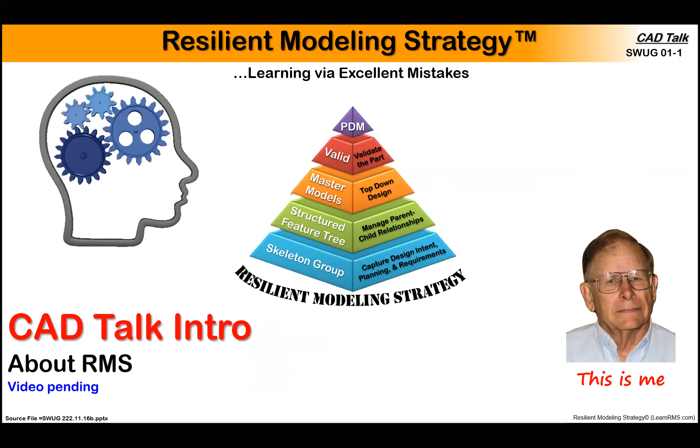Pushing the wrong button. Story of my life.

Okay, that's me. I was 54 years old in 1992, and I became a PTC value-added reseller in Arizona. Previously, 35 years, yes, I'm an electrical engineer dealing in mechanical shit. Radio communications, core memory systems, how about that for dating you? And semiconductor manufacture, memory design and manufacture.

So 1992, I fought in the CAD wars of the 1990s, became a Solid Edge VAR in 1998, and joined the solids modeling revolution of the 2000s. Yes, I'm older than dirt, 84 years old. In 2012, there were 4 issues that really bothered me. And I'll go through them.

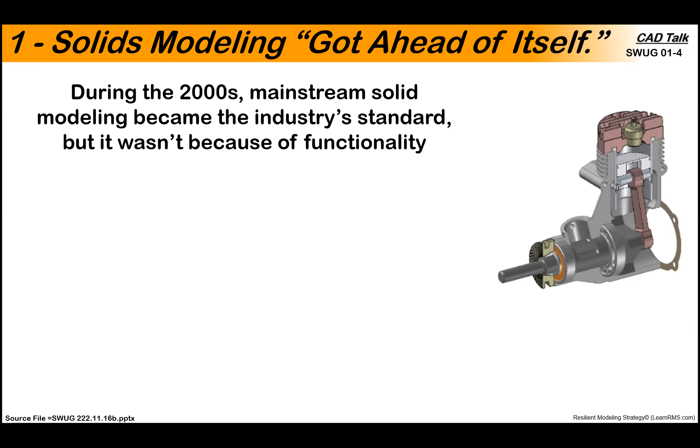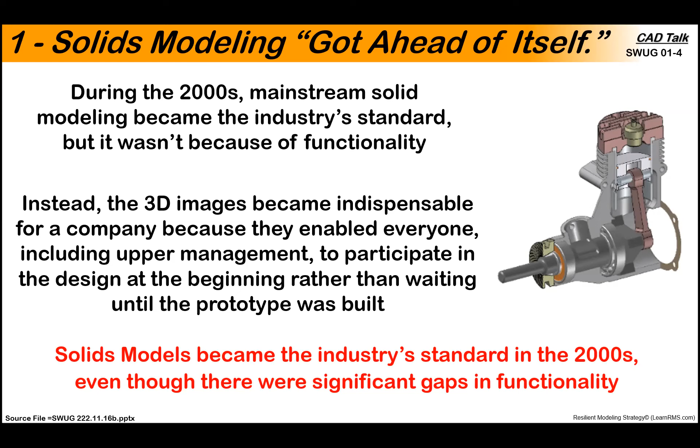The first issue was during the 2000s, mainstream solid modeling became the industry standard, but it wasn't because of its functionality. It was because these 3D images became indispensable for a company. They enabled everyone in the company to see what was going on. In the old days, we used to build a prototype, and that's when manufacturing could tell. So everyone got involved at the beginning. So 3D images were the thing. But solids modeling became the industry standard, but there were significant gaps and problems with its functionality.

And another thing, for every new software version, monetizable enhancements have priority. That's a given. And then users, but they're mostly prismatic modelers, vote on the remaining enhancements. Here's the problem. Advanced functionality isn't easy to monetize. So that didn't happen too easy. And prismatic modelers, they're up to their neck in problems, and they usually vote for Band-Aids, okay?

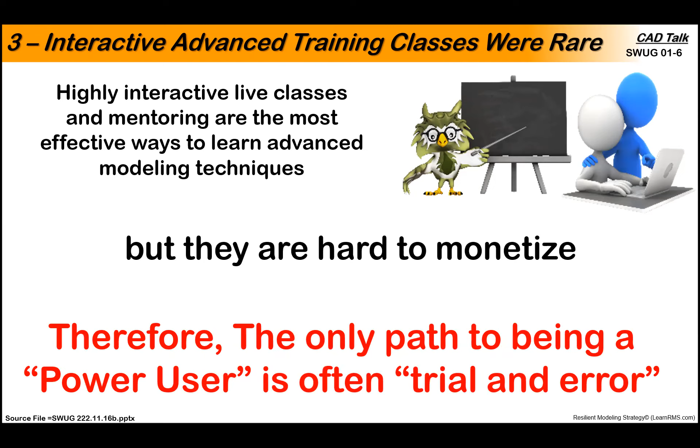Now, interactive advanced training classes were rare. And realistically, that's the only way to learn advanced modeling. It's the only way. But they're hard to monetize. So you don't see a lot of them out there. And therefore, the only path to becoming a power user is often just trial and error. And most of the power users that you see nowadays, they learned it on their own.

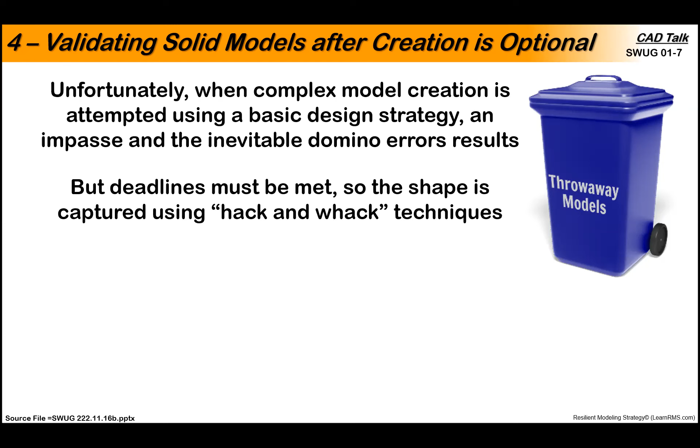And here's another problem that's plaguing us. Unfortunately, when a prismatic modeler, that's someone that's learned how to make models with the 3 default datum planes, attempts a complex model, he uses the same strategy. And it's not long before he comes to an impasse, he has domino errors and stuff like that. But deadlines must be met. So the shape is captured using hack and whack techniques. I think everyone here knows what that is.

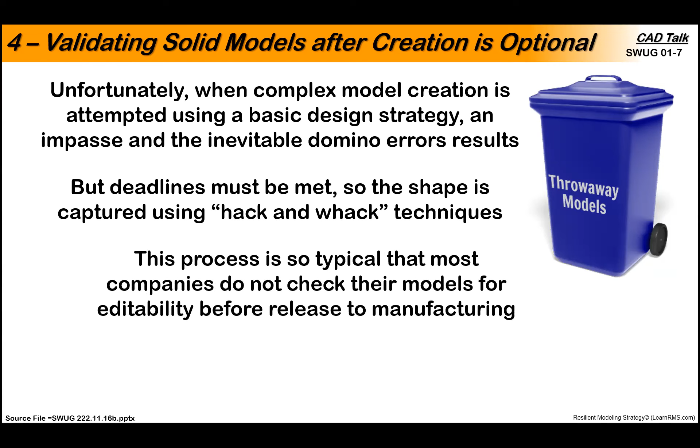And this process is so typical that most companies don't check their models for release to manufacturing. So there's an epidemic of throwaway models in the worldwide inventory. So in 2012, I decided to rain on the solid modeling parade. I had 20 years of interacting with power users, mentoring, and the 4 issues were a recurring theme. So I created a presentation called Resilient Modeling Strategy to highlight these issues, but more importantly, to offer solutions. And I selected Solid Edge University as my soapbox and proceeded to organize my thoughts.

That all came from the about section on my website. Just a minute. And there's 2 more pages to it. The second page tells how I failed miserably at communicating. And then the third is that during COVID, I worked on this. In 2019, I had pretty well given up, that no one cared about resilient modeling. I went on and worked on it because I didn't have anything else to do. All of a sudden, this thing kind of morphed into something that I hadn't planned in the beginning.

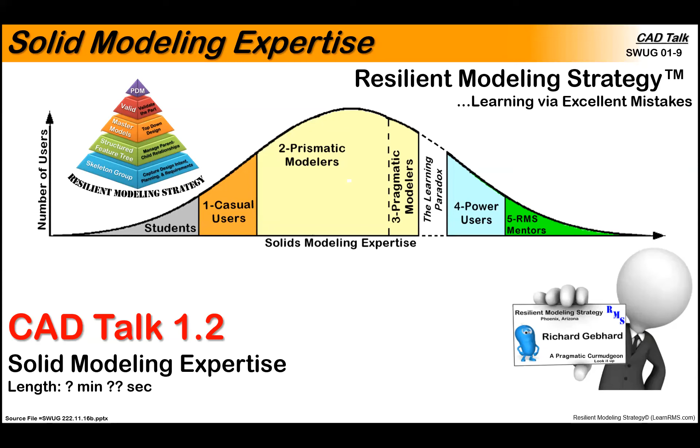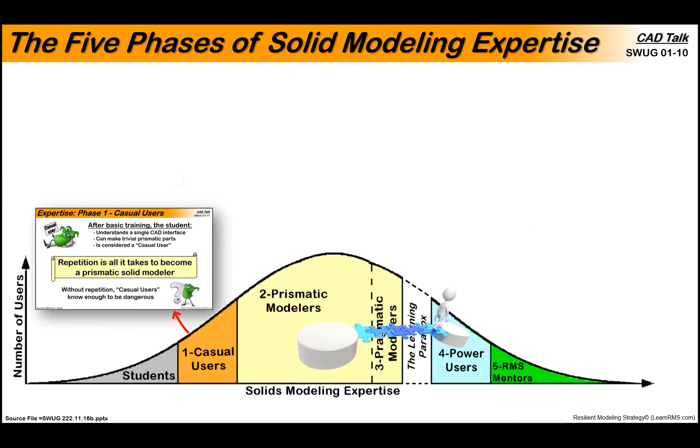What I'm sharing with you today is just some general thoughts on solid modeling, my experiences and stuff like that. And this is how I see solid modeling expertise. Of course, you got students, but when they're through making their simple little blocks with a hole in it, they become casual users. And then through repetition, they become prismatic modelers. And at some point, that population suddenly decides they want to be power users.

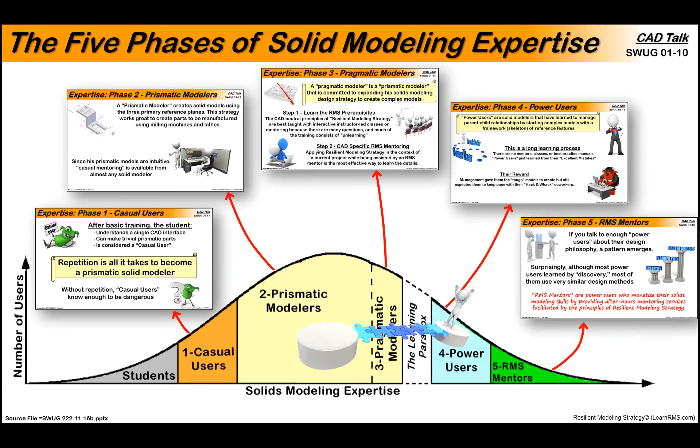So how do they do it? And that is the learning paradox, because it isn't easy. But quite a few made it. We've got quite a few in this room right here. 2 of them right back there in that corner. And they become power users and then go on to RMS Mentors. But I'm going to go into more detail here.

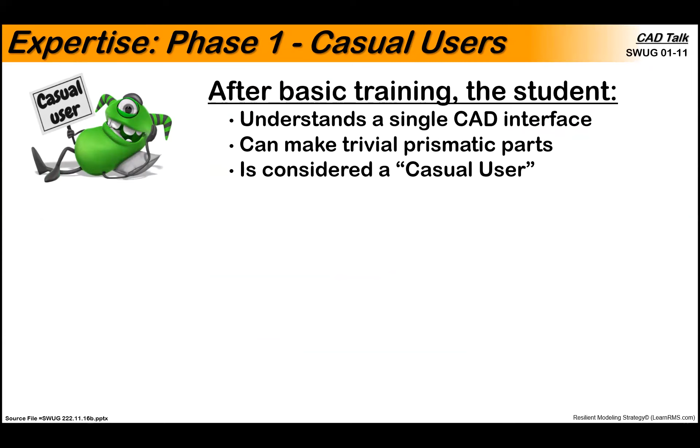Casual user. He understands a single CAD interface. He can make trivial prismatic parts. And he's considered a casual user. But all it takes is repetition for him to be a productive prismatic modeler. But without repetition, casual users know enough to be dangerous. And that usually applies to managers. Okay?

Think of this scenario. In the 90s or the 2000s, this guy was a manager. So he never got involved in making solid models, but suddenly everyone underneath him is making solid models and he doesn't know how to do it. And that bothers him. So he goes to an elementary class and learns solid modeling.

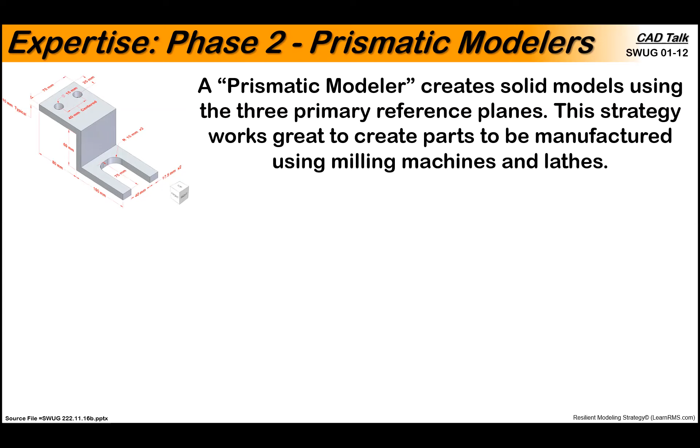A prismatic modeler creates solid models using the 3 primary reference planes. This strategy is great for parts that are going to be machined or turned. And since his models are intuitive, casual mentoring is available from almost any solid modeler. Casual mentoring, that's an interesting concept, but that's how you learn. After you originally did solid modeling, it was casual mentoring.

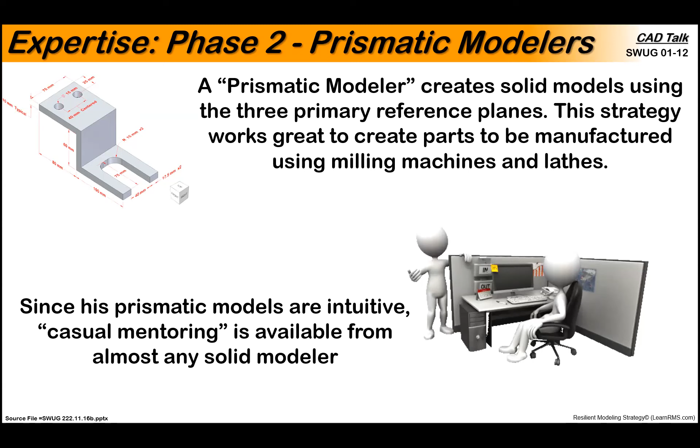You talk to someone, if you're in a design team or something like that, or friends, and you've really got a problem if you're in a company and you're the only one that does solids modeling, because who do you learn from? Okay, but that casual mentoring is the usual way people learn. But there's some problems here.

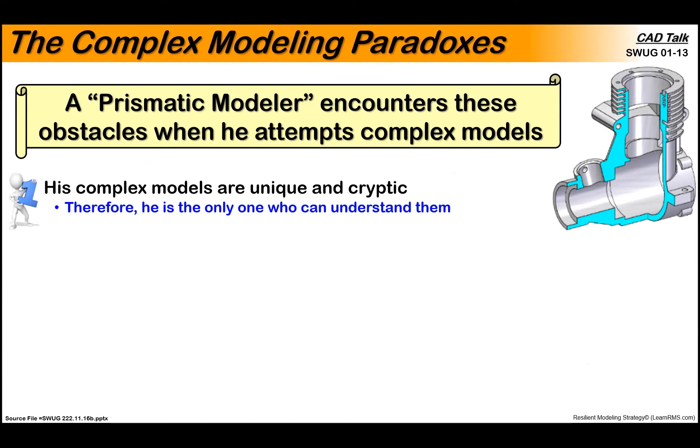Prismatic modeler, sooner or later, someone's going to ask him to make a model of something that he isn't ready for. Okay? And he makes a model, they're unique and cryptic because he used his basic 3 datum plane strategy. And he's the only one that can understand it. And because no one else can understand it, casual mentoring isn't available anymore.

And he's got unstable parent-child relationships everywhere. Editing is almost impossible, so he's continually starting over, and the schedules must be kept. So at some point, he just stops and starts hacking and whacking, doing whatever possible to capture the shape.

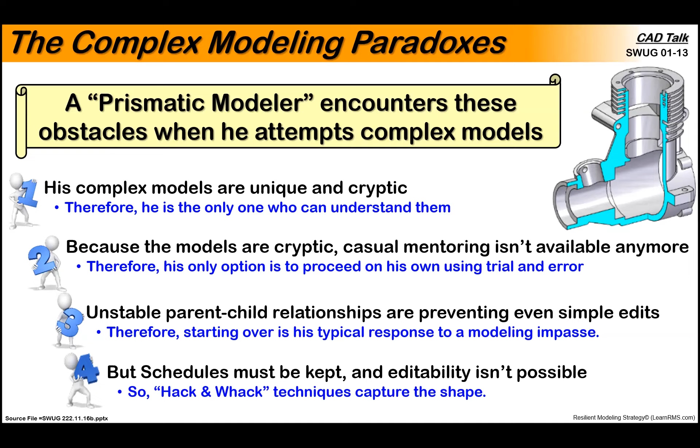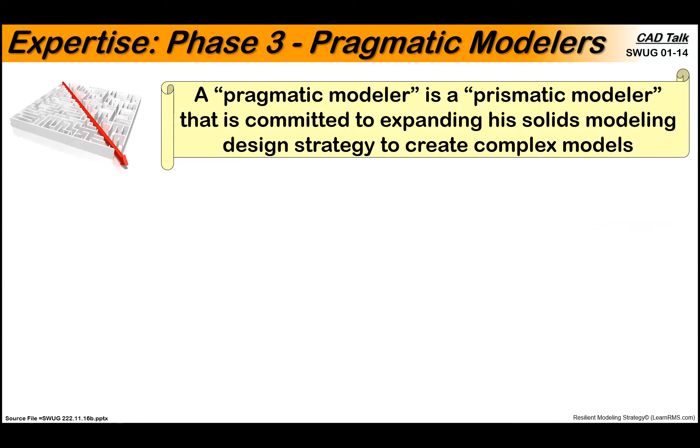Now, in the expertise phase, pragmatic modelers, they're prismatic modelers that are committed to learning how to make complex models. And their idea is to fast track. Seriously, the only way to do this is to learn the RMS prerequisites. These are CAD neutral, and they're best taught with interactive instructor-led classes or one-on-one mentoring.

And the reason is because there's so many questions that you've got. So many questions, and most of this is going to involve unlearning. Unlearning. I don't even know if that's a word, but it's what's going to happen. And so that's why you need an instructor-led class. A great example is Joseph Wright.

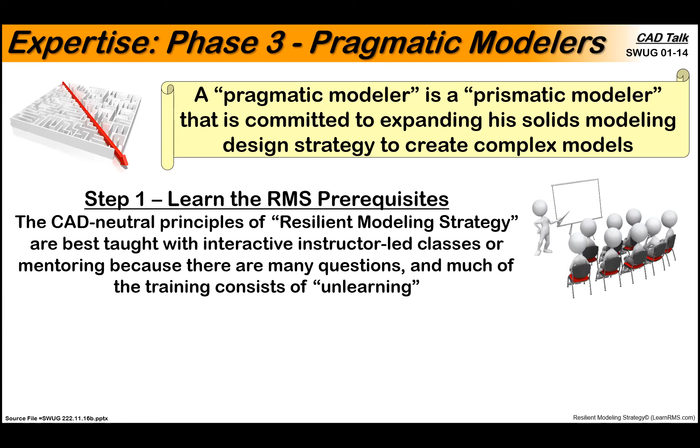And in fact, Go Engineer, I've been told they're going to be offering resilient modeling classes, instructor-led. And maybe some other people will do it. Right, Mandy? But this isn't enough.

Seriously, once you learn the principles, and they all revolve around the skeleton that you make before the first solid feature. But once you learn the principles, you need to have someone that can mentor you, not full-time, but mentor you on a project, on a real life project, that can do sanity checks in what you're doing, help you set up the skeleton and stuff like that.

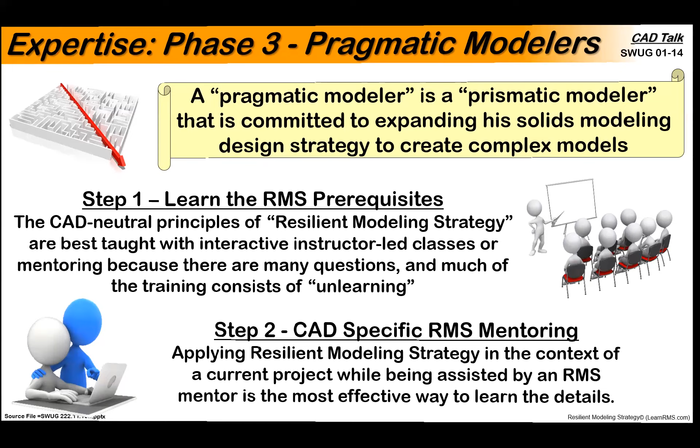And there's a lot of people in this room that know a lot, that are doing this a lot. They could be mentors and make money, moonlighting. But what they don't want to do is to have to do this first. So if this is done first, oh boy, okay. Don't mind me if I start talking fast.

Now, power users are the ones that have learned to manage the parent-child relationships. And this is key. By starting complex models with a framework, called a skeleton of reference features. You put reference features in first because, why reference features? Because they can be turned on and off. Their visibility can be toggled, but their functionality is still there.

And then as you make solid features, you're going to refer back to those and make your links to those reference features in the skeleton. The point is, what we want is parent-child relationships that are one to many. So we keep going back to the same circle rather than daisy chain circle from this one to that one. Anytime you start daisy chaining parent-child relationships, you're asking for domino errors.

I assume everyone here knows what a domino error is, but I'll tell you anyway, that's when you make an edit and then you're done, and all of a sudden, 10 features after that feature fail. That's a domino error. Most certainly it's because of parent-child relationships.

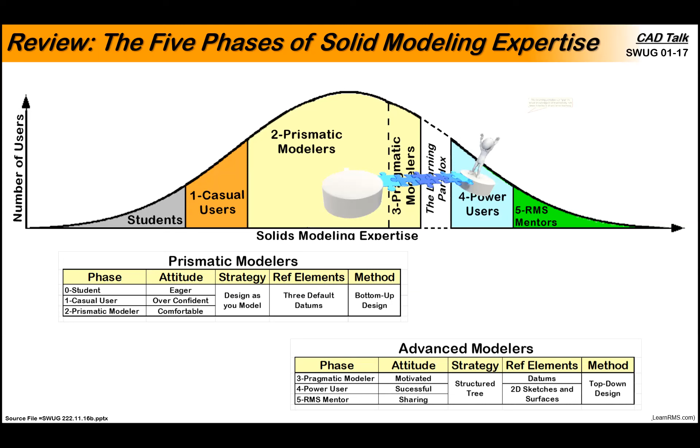Advanced modeling, well, the Pragmatic Modeler, he wants to make advanced models. The power user has made it. And the RMS mentor, he's making money. That's even better.

Now, this next one, I call food for thought. It's a bunch of standalone slides on various aspects of solid modeling. My wife thought I should call it potpourri. I don't get that. And I didn't think anyone else would. So that's what it is.

So in 1992, Pro Engineer changed everything. Yeah, this is a SolidWorks user group, but they were first. They had 5 principles. That's what they sold. Everyone that sold Pro-E, that was drilled into you. Jack Napoli was my Pro-E guy that taught me all that stuff. But this is what made PTC different. It was parametric. It was feature-based. It had associativity with the drawings. It captured design intent. And it had assembly management, particularly the automatic bill of materials.

In the 90s, I did some demos and seminars where at the end I got a standing ovation because I showed them so many crazy things that they never thought was possible.

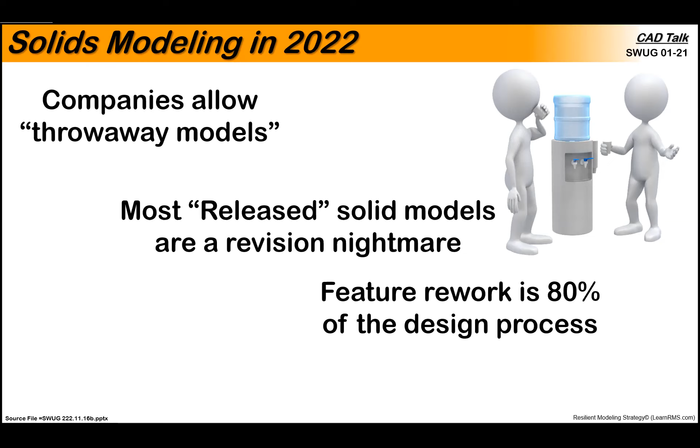Solid models, 2022: companies allow throwaway models. Most released solid models are a revision nightmare. And feature rework is 80% of the design process. And no one cares. You believe that? 80% is rework. That's just designing a model. From first feature to the last, 80% of the time you're doing rework.

You know what an undo feature is? You did something wrong. So instead of moving back, you take this undo feature, usually a cut, and you just cut the damn thing out. And then you start over again. Imagine now you've inherited this model and trying to figure out what he did.

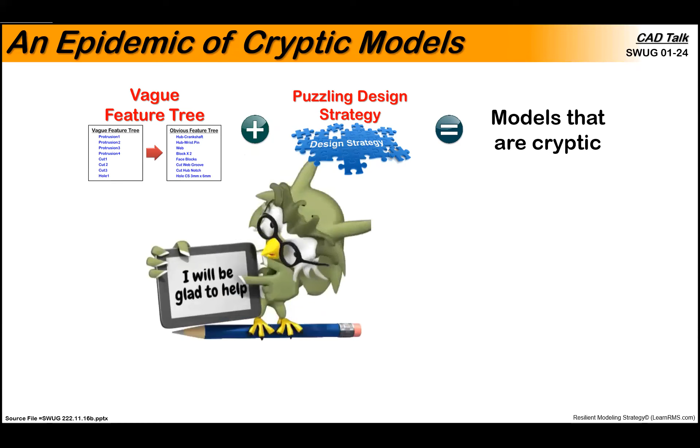Okay. So what we have is an epidemic of cryptic models, vague feature trees, puzzling design strategy, and models that are cryptic. And that's our mentor, our casual mentor.

And the casual mentors disappear. That's why trial and error has been the default advanced learning process. Every model is robust until the first edit. What if the model can only be edited by its author? Or what if he forgets how he made the model, or he left the company?

Successful edits often result in the dreaded domino error. And this is the worst part. Remember, we're revising. The author must explain how a 1-hour job is turned into a major problem without telling his boss that the model was flawed when they released it. You can't do that.

And then, what do model-based definition and additive manufacturing have in common? They both require editable complex models. Remastering isn't a viable option. If you're doing additive manufacturing, you make a model and now you've got to tweak something, got to edit it. You can't start the model all over again because you're going to be changing other things.

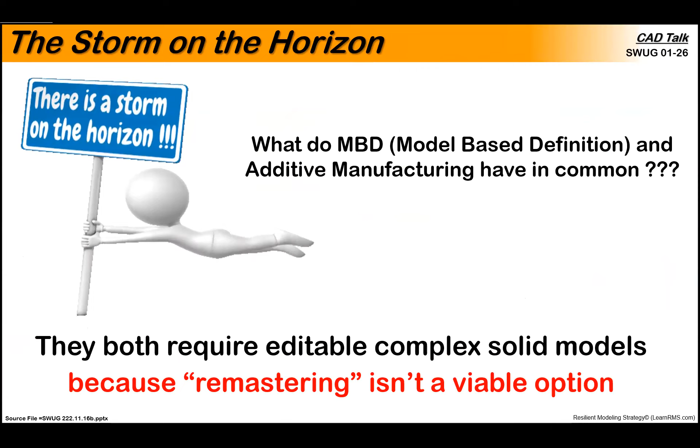My learnrms.com version 11 was released August 1st without any publicity whatsoever. Suddenly the website turned from version 9 to 11. Okay. Version 10 was skipped because of COVID. But this is just the last 2 weeks. 60% of my hits are coming from outside the United States, from countries where English isn't the first language. They're ghost followers and their numbers are increasing. I didn't expect this. This is just the last 2 weeks.

I've got to clean up my act. Seriously. And I'm playing catch up and I need feedback and a sanity check on the contents as soon as possible. I want people to find things wrong with it and I want to fix it. Because the way this is going, it's going to get out of hand. And so, perfect.

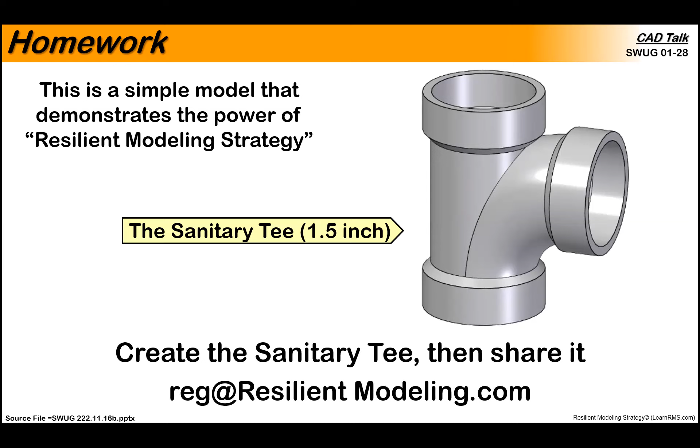So no one was expecting homework, I can imagine. Well, this is a simple model that demonstrates the power of RMS. Has anyone modeled this? Looks simple, right? Well, create the sanitary tee and then share it with me. There's my email. Share it with me. It's a challenge. And there are the specs. And this is a whole family of parts, but we're just going to make the 1.5 inch one.

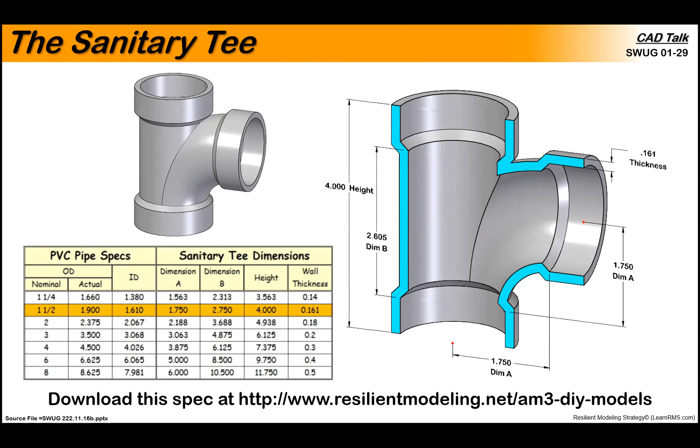Share this slide. I'm sorry? Share the slide also. Well, okay, people don't have to worry. You can just go there, or if you go to learnrms.com, you go to menu, and then you'll see a pull down menu, and you go to administration, models, and you'll come to a page that you can download. And that's right. So these slides came from these CAD talks. So you can go to learnrms.com, CT 1.2, modeling expertise, food for thought, and the do-it-yourself sanitary tee.

Now, since I have 2 minutes, I'll show you the website, I hope. There. That's the website. Go to About RMS. This is what you're going to see. This is the main menu. You can go down here to, oh, I lied. I said administration. It's actually overview. But there it is. DIY models. You click on that.

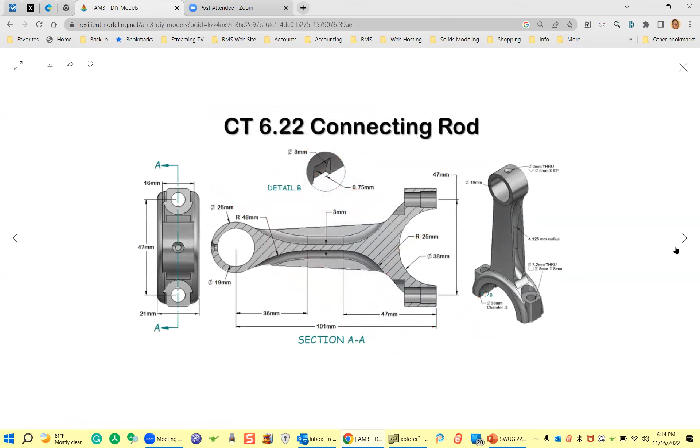Then you can see this. This is what I call a gallery. But each page has a gallery. If you click on it, you're going to see it like that. That. That. There's the sanitary tee. Each one of these pages has a download. You can download it, you'll get that image directly. And like that.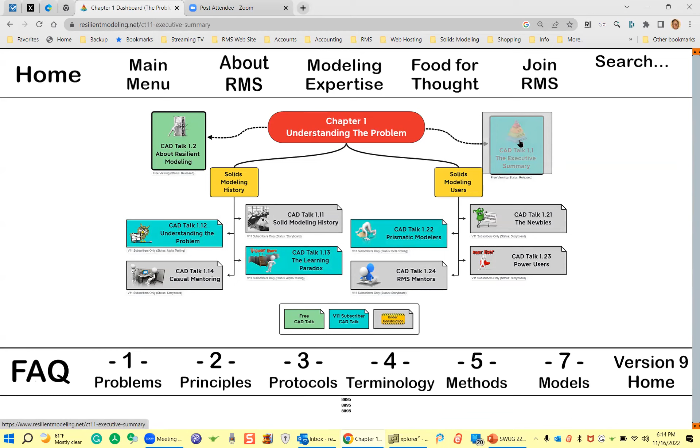Let's see. If you go down here in the bottom, problems, there you see various CAD talks. This is one that is for convincing the management at your company that you should do this. I'll just play it a little. Ooh, sounds terrible. But what you need to look at is, see these little dots? Those are bookmarks. So you can jump back and forth. You can also go here. And this is the table of contents, so you can go there.

And just a minute, I've got to shut that guy off. All right. Uh-oh. Give me a minute. On a roll.

Okay. So these are slides, hard copies of each slide. Here again, you can download it. This is a website that's just giving away teaching materials. I want people to teach resilient modeling. So why? Well, I do have a hidden agenda.